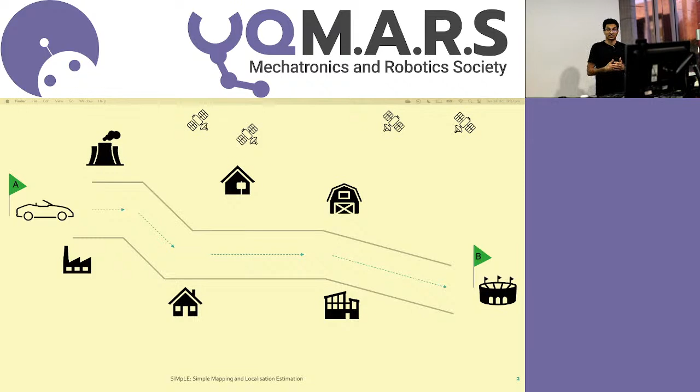The most common solution to this is to use GNSS. You know, GPS satellites tell me where I am at every single location. And it's very precise, it's highly accurate and reliable. But what happens if we lose that? So I get a highly vegetated area, or I lose my corrections, and I lose my pose information. Should the car just stop? How should it behave? If it doesn't know where it is at any single point, how can it go on and progress its path? Okay?

And this is where this line of work really starts coming in. What do you do in the absence of GNSS, or in areas where you don't have GNSS? We go down to an underground mine operation, you're not getting any GNSS signal there. How do you continue to form that ability to know your position in all these different scenarios?

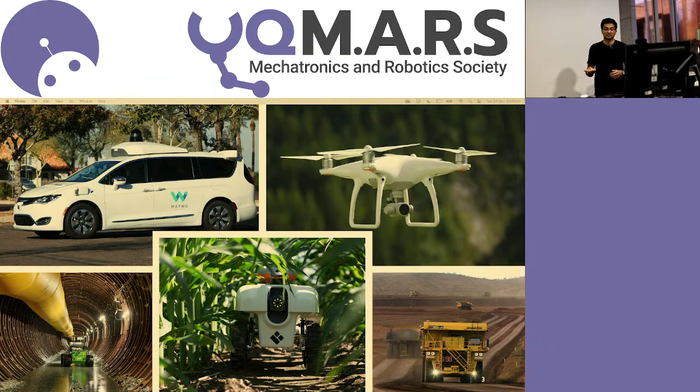And once again, this is a huge problem for autonomous robotics in general, whether it be the autonomous cars that are currently roaming all over America. You've got drones that are set to go on some fixed flight paths. They need to know where they are so they can follow a path. Agriculture is following this as well. And you've got the same implementation in mining robotics as well. They all need to know where the position of their vehicle or whatever agent they're looking at is at any one point. And this is commonly known as the where am I problem.

Now, it's a requirement for all autonomous agents, or most autonomous agents, to know their position relative to some reference. Now, this reference can be arbitrarily chosen, but what's important is that the agent needs to know where it is at any given time step.

And from our example before, a car needs to know its own position at every time because it wants to update its path to get to its destination. Now, most importantly, answering this question is a prerequisite for subsequent actions, such as decision making. To make a decision autonomously, I need to have a belief of the world, and that belief is provided by

these systems. More commonly, this problem is known as localization, and it's just as important for machines as it is for humans. When we go out somewhere, we always localize within our environment, so we know where we are. When you walked here, you followed some sort of known map and localized yourself within it so you know where you were going. If we want machines to perform autonomously, they need to be able to do the same functionality.

The first question that always gets raised is, why can't you just use GNSS? And we talked previously about how it becomes unreliable sometimes, but GNSS provides centimeter accuracy, and it's really great given these two things exist. So one, the GNSS receiver has a clear line of sight to sufficient satellites. Now that's great in an open area.

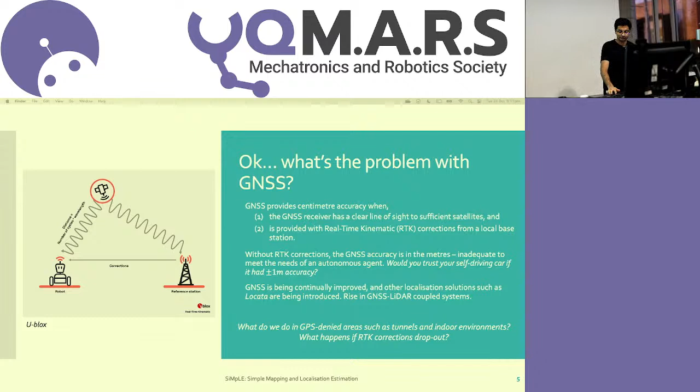And this is where this huge field of study called Simultaneous Localisation and Mapping, also known as SLAM, really comes in. And it's a large and expanding area of research still on how we can use observations of the environment to understand the agent's current location. Now, approaches to this problem are broken down into two main parts. And the first part is, how do you interpret the environment? That's where your sensors come in.

Now, sensors are wonderful. We've got all different types of sensors. Most commonly, you'll see cameras or laser scanners, and that's what we're going to be talking about today. But they only give us so much. They only give us a pixel value or a range measurement. The second part of the problem is all about how we interpret that information. And that's where all these algorithms come into play.

Back end is when we can use some history of sensor data to make a more informed decision. And most commonly, we have to use both of these if we want real-time and accurate results. For what we're going to talk about today, we're going to be focusing on that front end part, which is all about taking in sensor data at time K and forming that belief straight away. We're not going to be using the history or doing some batch optimization at all.

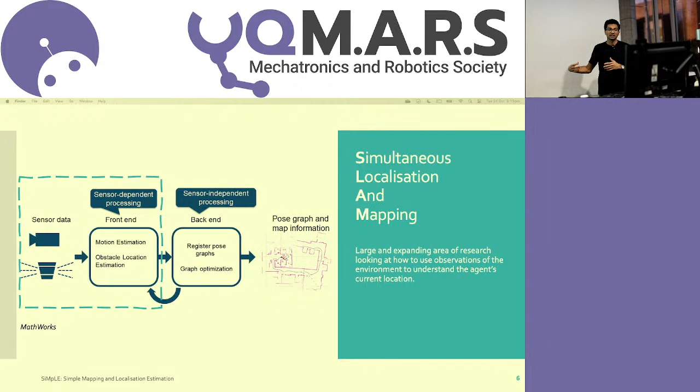In a 3D environment, that's a 6-degree of freedom problem. I've got my X, Y, Z that I can move in, and I've got roll, pitch, yaw that I can also move in. And we do this over and over again. So new sensor data comes in. Based on my initial position, so P1 now, I can go ahead and estimate what P2 is going to be. And that's what recursive pose estimation is. New sensor data comes in, and I estimate where I am right now.

Now, batch estimation is different because that's going to go ahead and use all those estimates, or the estimates within some window, to determine what the pose estimates are. Because one of the problems we see straight away with recursive pose estimation is if a single one of these estimates messes up, the subsequent pose estimates also mess up. And that's a huge problem. Sometimes maybe your algorithm fails, your sensor data doesn't provide you with the correct representation, and you use that and get an incorrect belief and build off that.

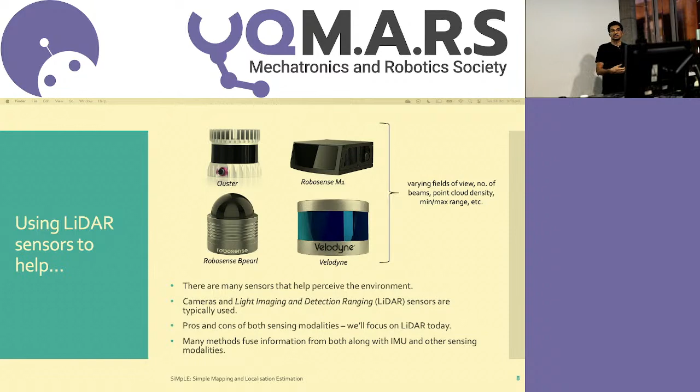So having a look at what a typical LiDAR output actually looks like. A LiDAR returns a set of range measurements at specified heading and elevation angles. So that's in spherical coordinates. And they can be very easily converted to Cartesian coordinates. So what we've got here is just a plot of individual points.

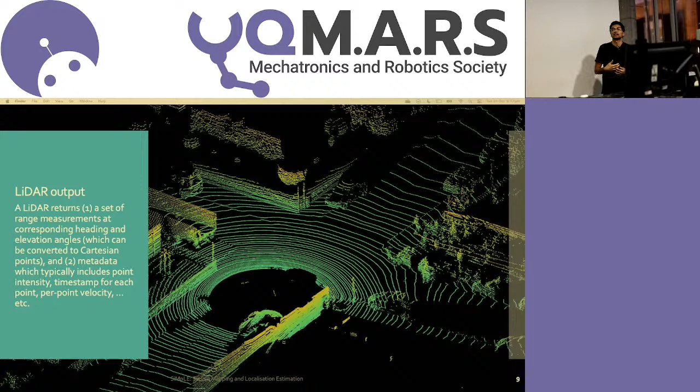What it also includes is metadata. And this obviously changes per sensor, but this includes stuff such as your intensity of each point, and some newer sensors which are including per point velocity, or the number of returns you've got on each point. But at its very, very basic level, all we've got is Cartesian points. And we somehow need to use this to build a belief of the environment and where we are currently.

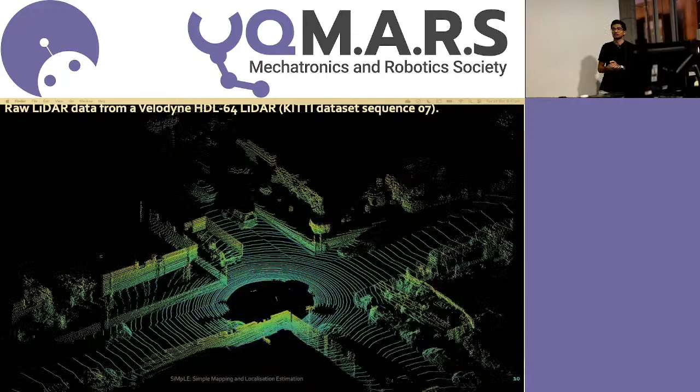So let's have an example of a quick video here. We've got a LiDAR that's attached on top of a vehicle, so rigidly mounted. That vehicle is driving around, and this is what the LiDAR is seeing. Okay? It's not making any interpretation. This is just raw point cloud data.

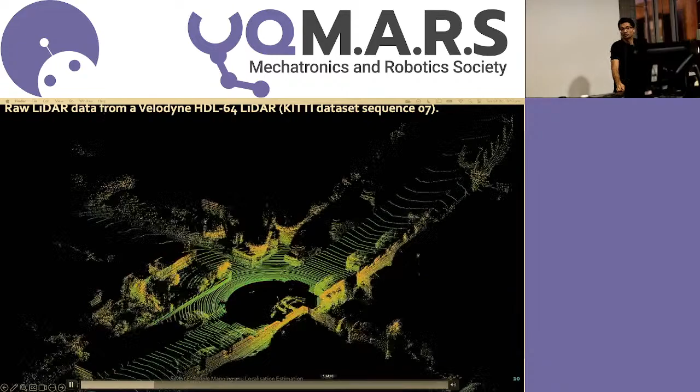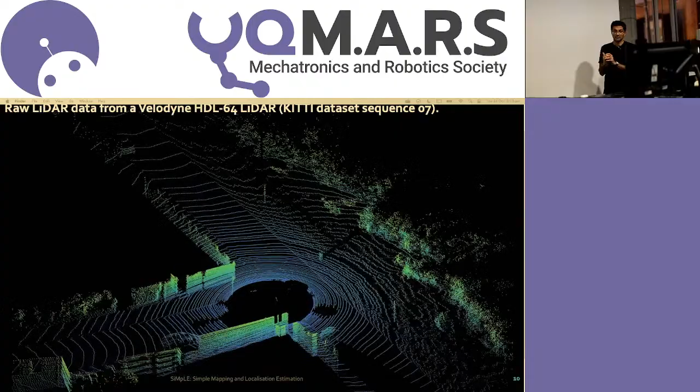Now, as humans, we've got great cognitive ability and pattern recognition, and we can start seeing, oh, look, there's a car there, there's a bus there, and we can say, okay, we're going pretty quick. If we turn, we can kind of see that. But to a computer who's only seeing this as X, Y, Z points, perhaps 100,000 of these per scan at 10 hertz, it's a lot of data it needs to build beliefs from. How do you go ahead and answer the question where you are right now?

Yeah, that's what we're trying to answer. How can we use this data to do that? So let's go through a very simple example. There we go. Let's say I got 2 scans. So this is using the same data you just saw. So I got a scan at t equals 0.1 seconds.

Like I said, these scans depend on the LiDAR I'm using. This is a scan from a Velodyne HDL64, approximately 100,000 points per scan at 10 hertz. So I get the scan at t equals 0.1 seconds, and I've got my sensor frame here. So that's just the origin of the sensor. At t equals 0.2 seconds, I get a second scan.

And we can see, most of the scan is the exact same. What we're really trying to find out is, have I moved based on this observation? Well, what is really going to help me is static observations, or static parts in that observation. So we've got some edges or some features here, which are also coming up in this scan. We've got the road, which is shown to be flat.

But if I was to go ahead and overlay each of these scans on top of each other, we can see that they're not the exact same scan. In the sensor origin, these geometric features have shifted, and stuff doesn't really line up. We've got some angle offset here. This should ideally be lining up with this. So what this is really showing us is that the sensor's moved within these two scans.

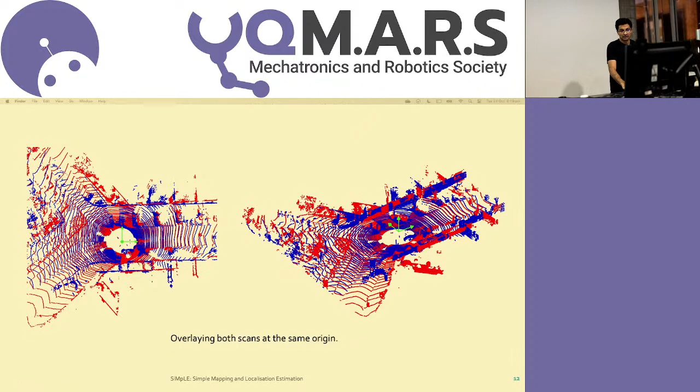So if I started to move around the second scan on top of the first scan, so adding in a bit of rotation, I can start lining stuff up. And I also moved this in the x-axis or horizontally and tried closing that gap. And you can start saying that when I do that properly, I can estimate how much I've moved. So by registering or matching these features, or points in this case, I can say, oh, that's where I was before, and this is where I am right now.

And this is the foundation of these ideas: based on these observations, I can go ahead and say, I've moved this much. And this is in 6 degrees of freedom. So I have moved in X, Y, Z, and I've rotated in roll, pitch, yaw. And that's the entire underlying theory we've got there. This allows us to determine how much the platform's moved within the time step between the two scans. So if my scans are coming in at 10 hertz or 0.1 seconds, I can say I've moved this much in 0.1 seconds.

And doing this recursively, so that recursive pose estimation is coming up again, I can go ahead and try to, one, build a trajectory of where the sensor's been. And if that sensor is mounted rigidly to a vehicle, you know where the vehicle's been. And two, you can try to build a map of the environment which has many potential uses.

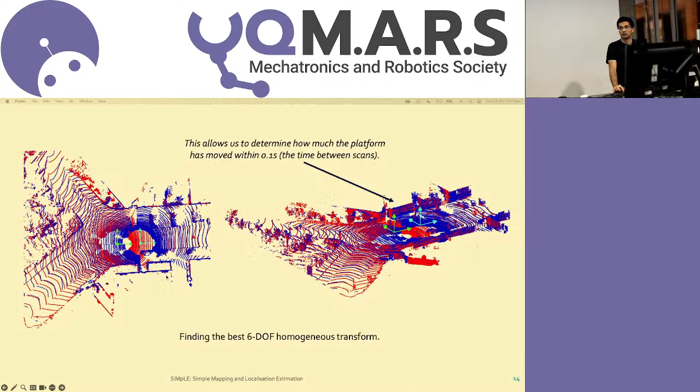Okay? So this is the general approach to pretty much nearly all the algorithms out there. There's two parts to it. One is an objective function, and it's a fancy way of saying, or having a quantitative score for how well the two scans fit. When we looked at the examples earlier, we knew that the original scan didn't really fit well. And this was just more qualitative. We were like, okay, stuff isn't lining up here. But when we tried fitting stuff together, we go, okay, that's fit well. That's our error metric, or that's our objective function for how well two scans actually fit.

The second part to this is what we were doing in 2 steps. A pose search algorithm. How do I find what that magical transform is that moves one scan on top of another scan? And in terms of a 3D case like ours, that's those 6 parameters. So roll, pitch, yaw, and X, Y, Z. How do I find what those values are? Now, one approach that comes up straight to mind is, why don't I just test every single possible approach within some window?

So why don't I do a brute force on all the possible angles and all the possible translations? In a 6-DOF space, that adds up very, very quickly. And now we go back to one of the requirements, which is we want real-time pose. How do you search for all those poses? Maybe in the future there's a computer that's fast enough, but currently it's not a feasible approach, because that goes very, very quickly. What we require is some sort of pose search algorithm or optimization algorithm that goes ahead and finds the best pose that achieves that objective function.

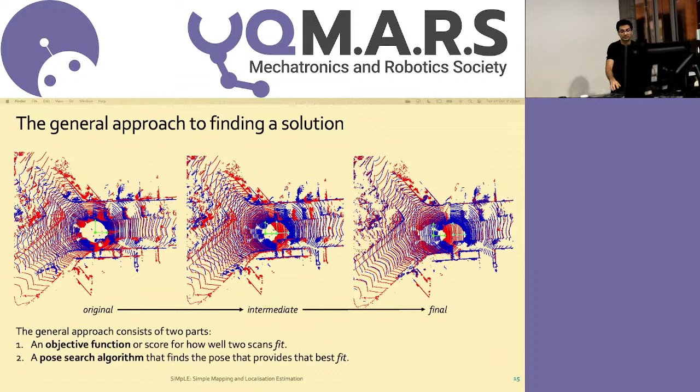Now, the most popular approach is from the 1990s, and you'll be surprised at how prevalent it is still today. It's called the iterative closest point algorithm. It's a very, very simple approach, and it's kind of what we were doing in the previous step. So over here, when we were comparing these two scans, we were pretty much examining the error between these features, right? Where do we minimize this error between these different features? That's essentially what the iterative closest point algorithm is. It's trying to minimize the error between features and find the best pose

that provides that. It's got 6 steps: selection, matching, weighting, rejecting, calculating an error-based metric, and minimizing that error metric, so that optimization or search algorithm.

Now, it works really well given perfect data. What we know from the real world is real data is noisy, and it has dynamic objects. So on that error-based metric, we're assuming a static scene. If I had a vehicle in one of my scans, or many vehicles if I'm traveling on a highway or in an urban environment, and stuff moved, trying to minimize the error between point clouds won't get us too far. We'll have error build up. And that's where this algorithm breaks down.

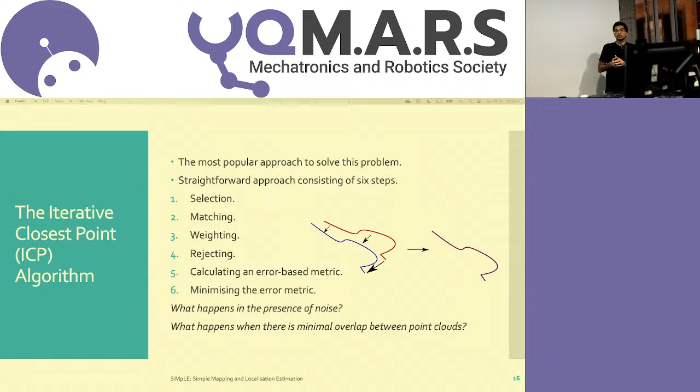One is approaches are tailored to a use case. Many of the early algorithms were all indoor-based and with 2D LiDARs. You tried to do the same algorithm outside and it broke because it wasn't a static scene. And that's still the case today. Most of the algorithms out there work in very specific environments very, very well, but you try porting them to a different application and they break. That's not what we want. We want something that's robust.

The majority of the solutions are based on the iterative closest point algorithm, ICP, and we talked about why that's a problem. And the third thing is we've got huge development in sensing technology. Going back to 1990, there were only 2D LiDAR scanners. Coming to 2013, we've got 3D LiDAR scanners, giving us much more information about the world. And now we've got even more information: per point velocity that can be used to improve these algorithms.

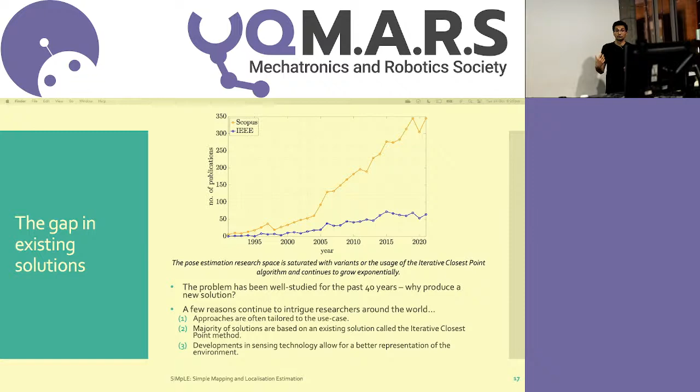Just having a quick look at what actually exists out there. You've got state-of-the-art algorithms, and these work really well for the environments they're designed for. However, the problem is they've got up to 107 configuration parameters. Finding the permutation that works best is hard. If your application doesn't work straight out of the box, you're going to have to tune those parameters. They're using pose graph optimization, so that's the back end along with the front end. They're extracting all these features, through normals and point cloud properties, all to find how much the vehicle or platform has moved between two time steps.

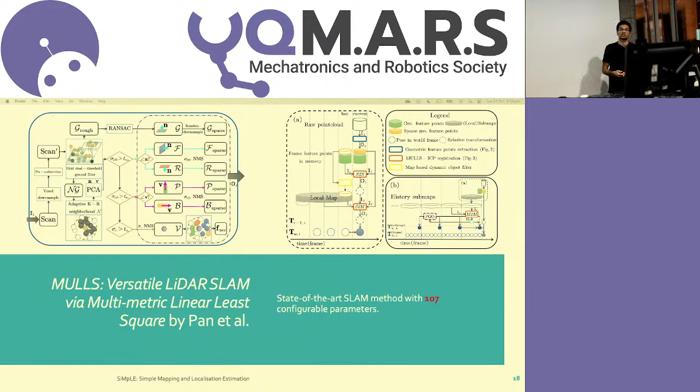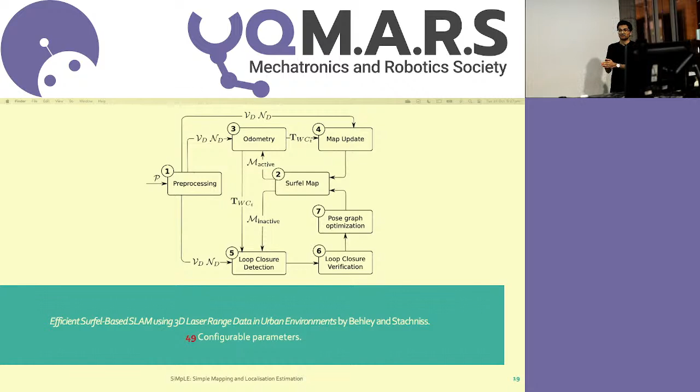Second example, once again a very popular algorithm, but the same problem occurs. You've got multiple steps, you've got 49 configuration parameters, and the permutations you have to go through to find something that works is painful. And that's not what you want out of a good algorithm.

A third example, so once again, this is a very popular algorithm where they're converting it from a spherical coordinate frame to a range image. They're segmenting out different parts. What we see is at the center of all these algorithms is the ICP algorithm. So once again, they're improving on this very basic algorithm to overcome its limitations.

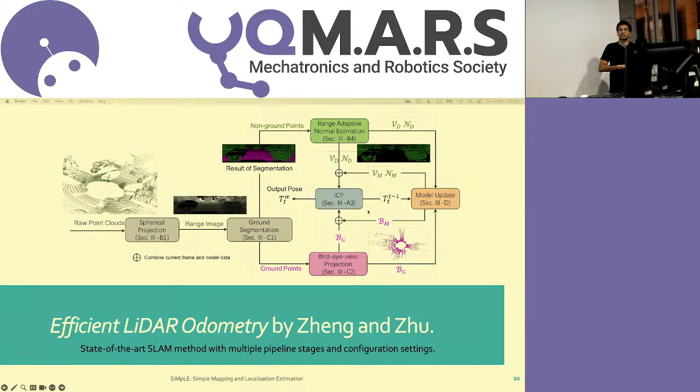So just have a quick break there. We've gone through the problem of what we're trying to do. We've gone through the theory, at a very high level, of what the current approaches use. We've understood what a LiDAR is, what the outputs of it are. And yes, it is very pretty, but it's always much harder to make sense of that information. We're trying to interpret what's actually happening. We've gone through some of the state-of-the-art approaches and the gaps that exist. So we still want some algorithm that works out of the box, in different environments, with different sensors, and on different platforms. And that's what we've been working on here.

So our approach, it's called SiMpLE, for simple mapping and localization estimation. And it's called SiMpLE because it's simple. We've got 3 steps with 4 configuration parameters. And we're going to walk through the steps and, more excitingly, the results in a second. But essentially, out of the 4 configuration parameters, so already we're down from 49 and 107, so significantly less permutations, 2 of them are purely for computational benefit, and one of them's a convergence tolerance. So only really one of the parameters is left to make a significant impact on how the algorithm runs.

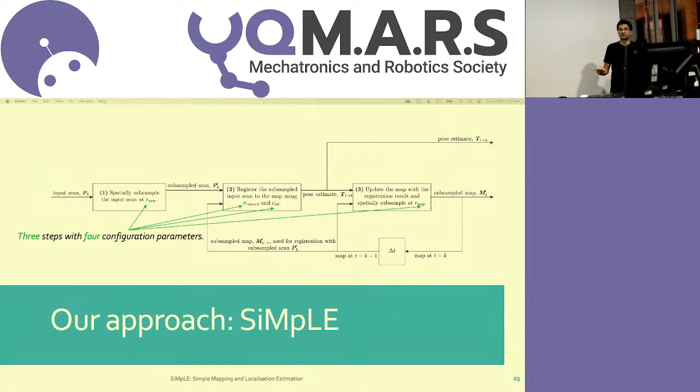So let's say we've got 2 scans essentially. The map is essentially a scan we've built up over time. So the existing map and a new scan. What we were doing previously was calculating an error. So this dij, we were just going, oh, what's the distance between this? And we'll go ahead and minimize that distance straight away.

However, what we're doing now is we're actually going to reward this with a Gaussian function. The benefit this actually provides is when we have dynamic obstacles or parts that actually don't exist between both scans. If we've moved too far, I might not see this building again. Instead of trying to minimize that error that doesn't actually exist, which would normally take some sort of outlier rejection scheme, we're just not going to reward it.

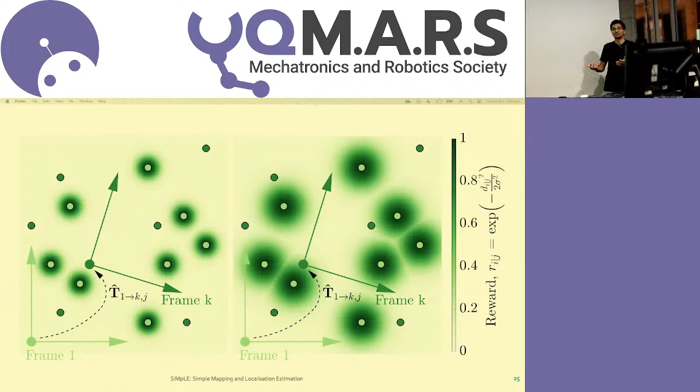So the points that don't contribute to the reward, they don't contribute to the pose solution we're looking at. And that simple idea is making that significant difference we're about to see in the results. And that sigma, so standard deviation for that Gaussian function, is just how much we want to reward. It's a tuning parameter, but it's very insensitive.

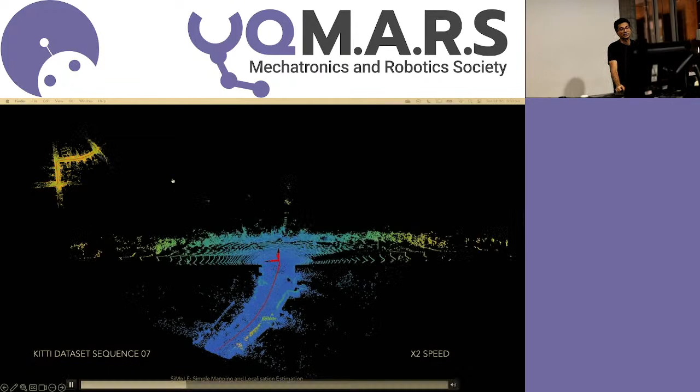So we had a look at the scans that we saw earlier. Now, using those simple ideas, if we go ahead and try to stitch those scans together, what do we actually get? So from stitching those scans sequentially, we can actually estimate our trajectory. So that red coordinate frame is our vehicle there. And at the top, we've got a map which is being built of the entire environment. So that's just building a map over time. There's no batch estimation. It's just recursive pose estimation.

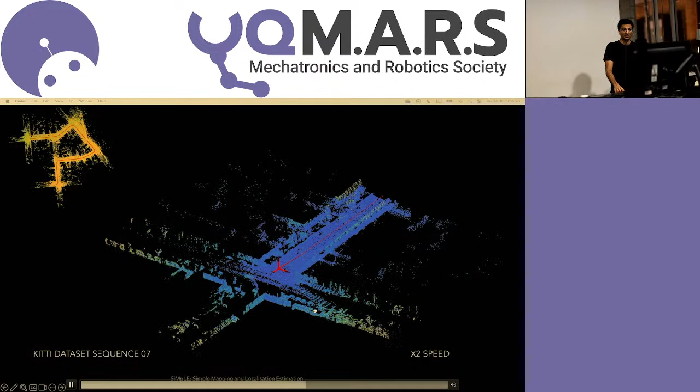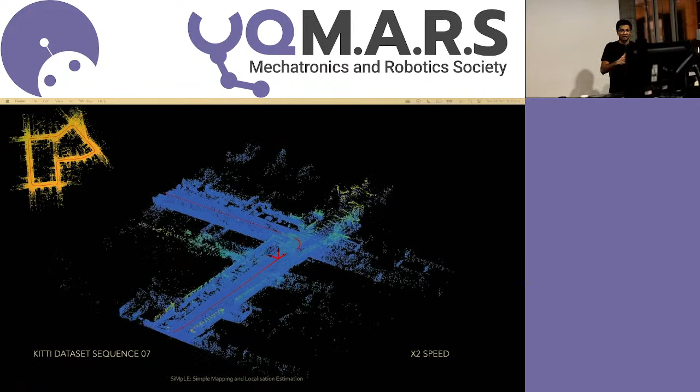So driving across the road, we'll see some cars in a second. But this is scan-to-scan stitching. This is essentially what we're doing with the SiMpLE algorithm. So you can see there's cars crossing the road there, and the vehicle's waiting. So without any GNSS, we're able to answer that question of where am I for autonomous vehicles. And I'll let that finish. So we end up at the same position where we started. So we've got low drift over, I think it's 1,000 scans for this sequence, played at 2 times speed. And we end up with a final map, which we can use in a later application.

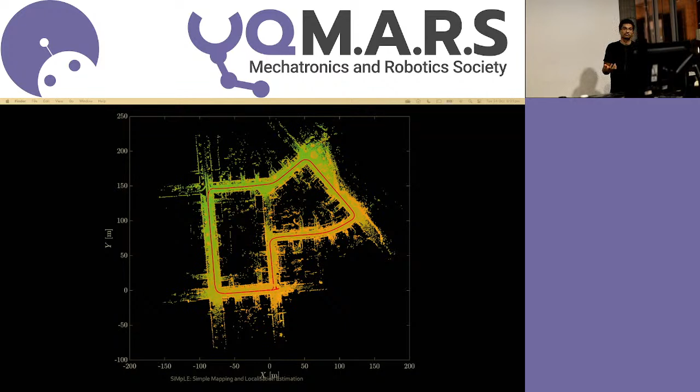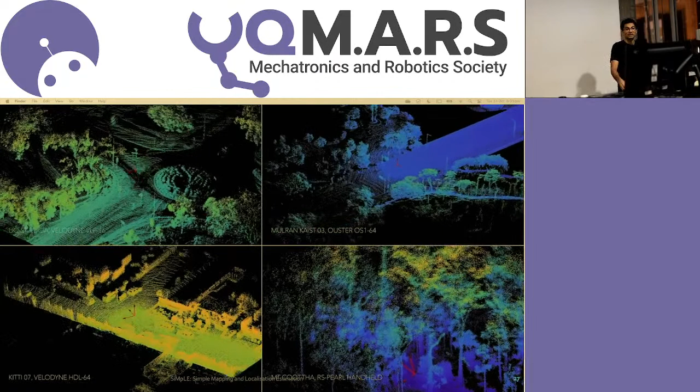Okay? And we go ahead and try and do that with a whole heap of different scenarios. We don't want this to work with a single sensor. So we've got a Velodyne VLP16, so down from 100,000 points to 14,000 points per scan. That's at UQ. And I'm going to go into each of these data sets in a second. We've got a MulRan data set, so that's over in South Korea. Completely different sensor, still able to achieve the same accuracy. That's the data set we just saw.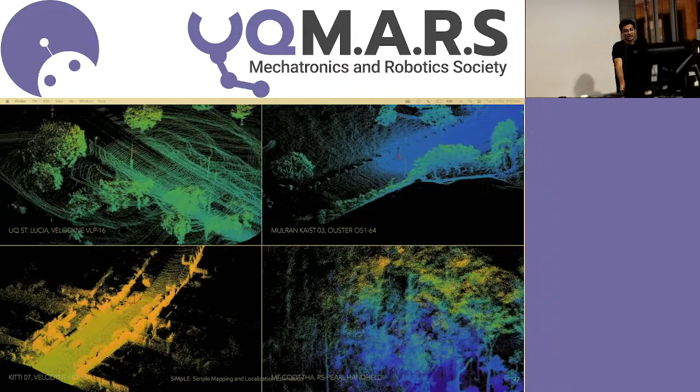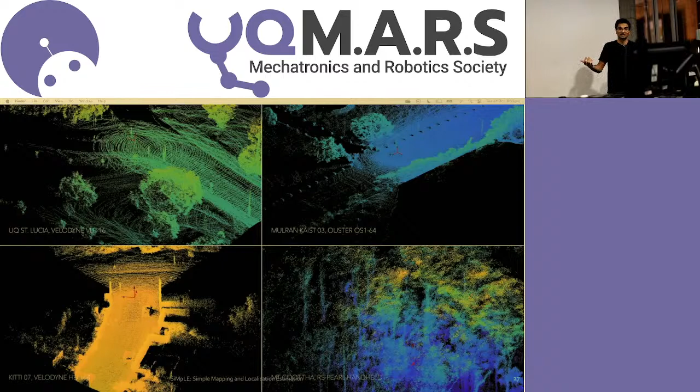And this one down there is a handheld RoboSense Bpearl. We're going to go into that one, but essentially mapping a forest with a handheld sensor. So the platform is a human person. But the entire goal there is to demonstrate that it works with, one, different sensors, in different environments, and on platforms with different dynamics.

What do we actually do differently that works and doesn't rely on ICP? So most of the modern approaches will rely on ICP, like we saw earlier, and the problem there is the error-based metric. We don't want an error-based metric because we can't handle dynamic objects or when we've got minimal overlap. We essentially reformulate that problem from scratch, and instead of minimizing error, we maximize reward for points being close to each other. And this overcomes the majority of the problems we're looking at. We don't need pre-processing or point cloud segmentation that's generally required in most of the ICP-based methods.

We also don't need, so this work is currently under review in some journals, and we've got an open source implementation ready to go. Hopefully when that's passed through, it should be available. But in the meantime, like I said, the KISS ICP is absolutely wonderful. So I would highly recommend looking into that as well.

To actually test how we performed, because obviously you can make an algorithm, you can say you're good, but you can't show that you're good until you've benchmarked. And there's no point in giving this talk if we can't meet the same accuracy requirements as some of the existing algorithms. So to understand and evaluate our performance, we went ahead and tested these on various scenarios. One of them was benchmark datasets. And these are just datasets that all algorithms mainly use to show, okay, we get this % accuracy compared to a GNSS solution. Because that's the only ground truth we really have.

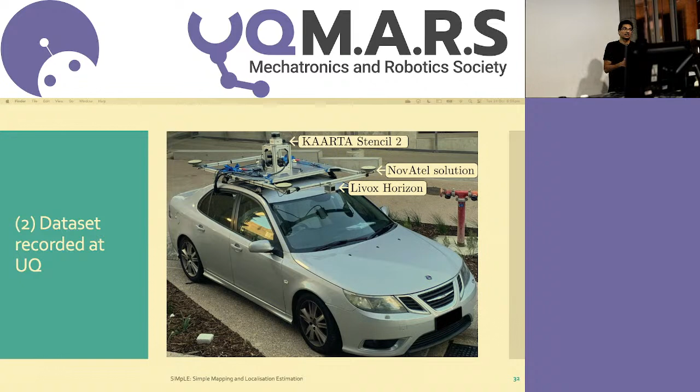And that's where we picked two different sensors. So we had a Velodyne VLP16 compared to a Velodyne HDL64, and we had a Livox Horizon, just so we could get a completely different scan pattern and see if it still works. Now, we had a Novatel GPS solution, so we could compare how our algorithm performed. And we also had a Kaarta, which is a commercially available SLAM solution to test how it performed.

Now, looking at some of the results, so these are all around UQ. So the first one, we did a very simple couple of loops around the athletics area and the Kaarta odometry. So we've got two sets of Kaarta results. One's recursive or front-end pose estimation only, and the second is its SLAM solution. So it's front-end and back-end. And that's what it's really powerful at. And you can see even in the solution for the athletics area, it performs very well.

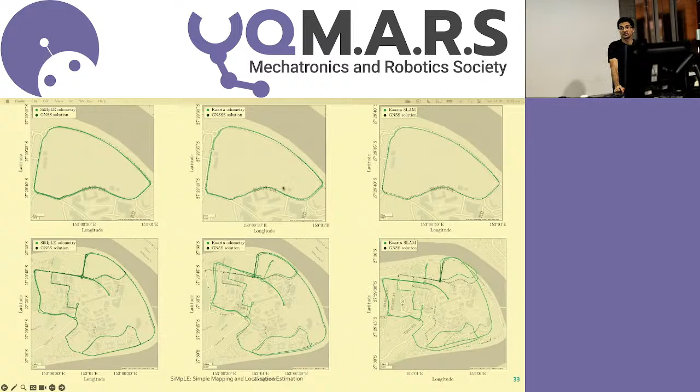However, when we go ahead and try to do a much longer sequence, consisting of 14,000 scans around UQ, using the Velodyne VLP16 data, SiMpLE performs quite well with low drift, even though it's such a large data set. Whereas the Kaarta actually breaks. So it performs really well for small sequences, but larger sequences it can't handle.

To try with a different sensor, we tried with a Livox Horizon. So a completely different scan pattern. And we mapped out the path from here up to the ferry terminal and back. And once again, it lines up very nicely with the GNSS solution.

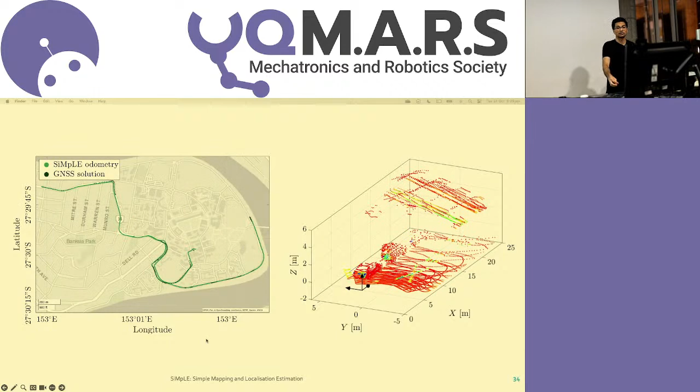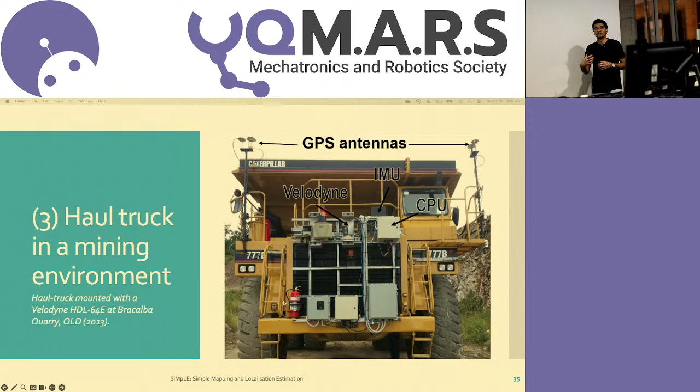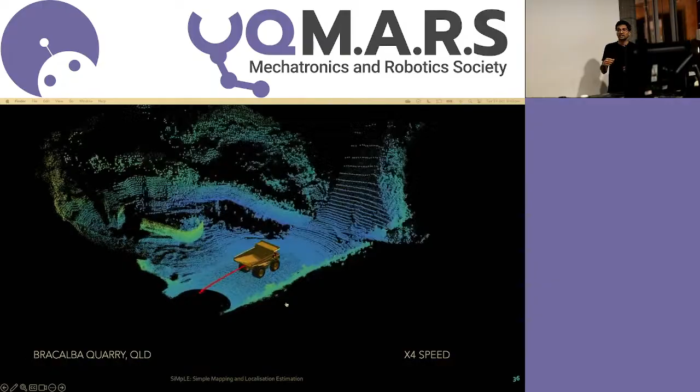For a different use case, we found a data set which the Smart Machines group had from 2013, where they mounted a set of sensors, including a GNSS solution and a Velodyne, on a haul truck. Now, very different dynamics, very different environment. And to examine how it went, these are at 20 Hertz, so even faster, even though we only have half the data looking in front of us. Once again, we're able to map the environment and form a trajectory. Now this is 4 times speed because the haul truck was very slow.

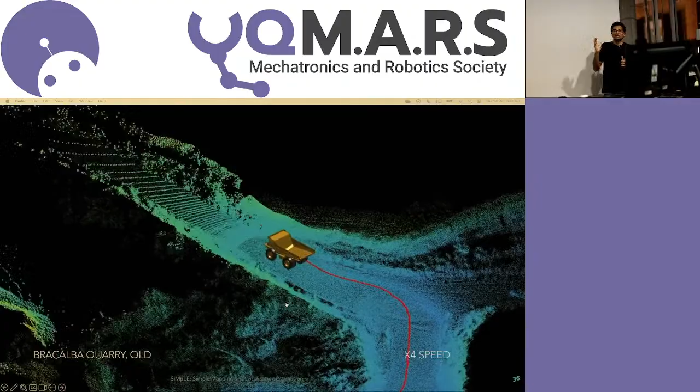But the main difference we're trying to illustrate here is we're not doing any feature extraction that other methods would fail on. So other methods that are looking for light poles, looking for the road, looking for buildings, they would fail in such an environment because that doesn't exist in this example.

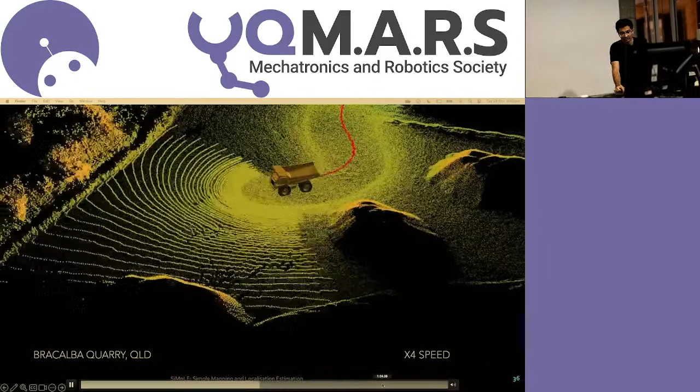So I'm just going to quickly get to the end, just because there's a map. So that's the entire map it builds at the end, and that's a GNSS solution in comparison to it. Now, one of the main things in, for example, open pit mining is, you've got a great clear sky, you've got great GNSS solution. Do we even need these methods?

Well, if you've got loss of RTK corrections, or you go under gantry, or anything where you lose those corrections, you don't want your vehicles to just stop. You want them to continue operating. And that's where these intermediate solutions will come in. And specifically in the tasks of mapping, where you're trying to build a map of the environment, any errors in the GNSS pose solution carry on to that. So can you fuse a GNSS solution with your solution and get a better estimate?

Now for a very, very different application, we did a handheld LiDAR at Mount Coot-tha at one of the trails. And this wasn't me, this was one of the thesis students who needed some data. I was like, sure, I'll take the data. So that's what the data looks like. Just raw scans. It's very shaky. The student was probably holding a laptop in one hand, the LiDAR in the other, and walking around this track. And we can just about make out, there's a tree there, the path's there.

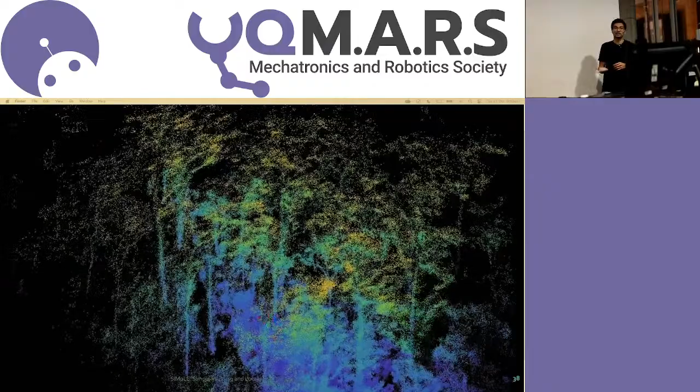And if we go ahead and run SiMpLE on that, we can see that the trees start to form. So we can start making a very dense map in that environment. Now, once again, same algorithm, same parameters, it's working, and that's what we want. Once again, this might be an environment where you actually might not get GNSS solutions, which is why we couldn't compare it to a truth. But the map and overlaying it on top of Google Maps helped validate that this was indeed working. So that goes on for a while, I'm just going to skip that. But once again, very different environment.

And the question that gets raised is, okay, where does this go on now? So we provide a front-end LiDAR odometry solution only. And the solution works well, but like I said earlier, a single incorrect estimate and everything's off. And the data sets we've tested with have had full scans, nothing's gone wrong there, but it's very likely that when you implement this in a machine that's operating 24/7, something will go wrong. And you don't want your robot to be driving off a cliff.

So it's going to be ideal if we attach this onto a back-end solution. And there's many out there that are wonderful and great. The only thing is they come at the expense of adding more configuration parameters. So maybe there's work to do there as well. We can also improve the solution of our own result. So like I said, addition of a back-end, incremental smoothing, where we don't actually have loop closure, which is what a lot of these back-end solutions rely on.

Sensor fusion with other modalities. So you've got IMUs, you've got cameras as well. You can add redundancy in there. And many of the existing algorithms do this. We just wanted to see what we could get out of a point cloud and get that to work. You could also have inclusion of a process model with filtering methods. Once again, all in the attempt to reduce errors coming into the solution.

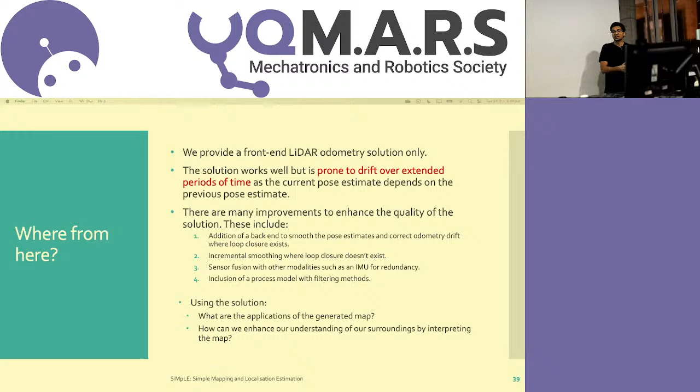And then the question gets asked, okay, we can provide a trajectory that has heaps of applications in its own. We also produce a map. What applications does it actually have, and where can that be used? The other exciting thing is they've got new sensors coming out that provide more information.

So a major downside of point cloud to point cloud registration or scan matching is you require features. If I go into a tunnel environment, it thinks it's not moving. Even though the car would be speeding up at 100 kilometers an hour, it breaks. Okay? And that's just by the nature of the algorithm, it requires geometric features to go off, which is why it works great in urban environments or in forest environments, it's got stuff that it can match. In a tunnel, it will break. On a long open road, it will probably break as well.

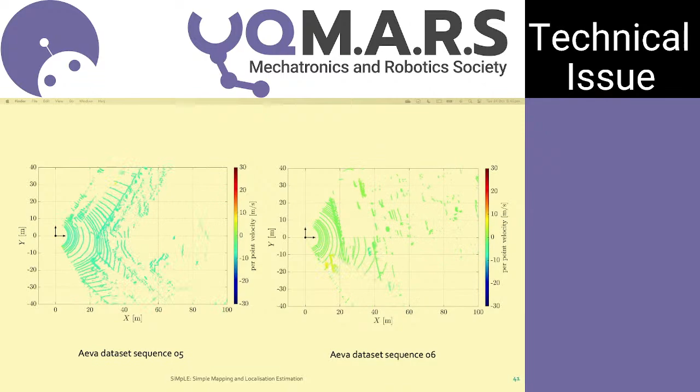These sensors have started to provide per point velocity as part of hardware. So instead of only receiving range measurements of specified heading and bearing and elevation angles, you actually get how fast that point's moving towards the sensor. And this has opened a whole new set of possibilities. Can we use this information along with SiMpLE to go ahead and map environments such as tunnels? Can we improve our own estimates based on this information? It's a whole new dimension of information we're being provided with.

So in this example here, this is going down quite a featureless environment at -20 meters per second. So that's the point velocity towards the sensor. But that's some of the exciting stuff that's still happening.